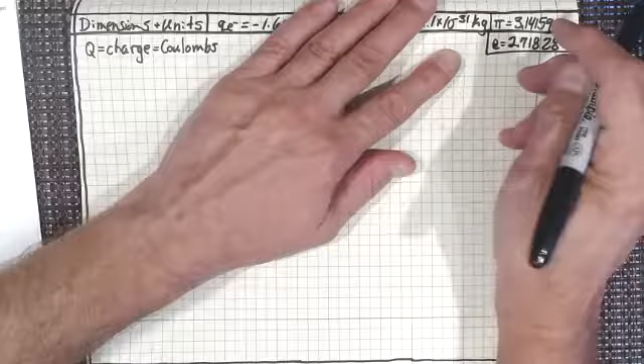So take that away with you, and you're probably way ahead of me guessing what I'm going to ask you to do next. Now let's just look at this for a second. So I know that one electron is minus 1.602 times 10 to the minus 19 coulombs, right?

So then the next question is, if I had a bucket of electrons, and inside that bucket was 1 coulomb's worth of electrons, right? We've got a bunch of electrons trying to escape here out of my electron bucket. So I've got a bunch of electrons. How many electrons do I have in that bucket?

Think about it. How would I figure out if I had minus 1.602 times 10 to the minus 19 coulombs per electron, how many electrons would I have in 1 coulomb? I'm sure you're saying, okay, his units there, coulombs per electron, if I just reciprocated that, I'd have electrons per coulomb, right? If I just took the reciprocal of 1.602 times 10 to the minus 19,

I would get 6.24 times 10 to the 18 electrons per coulomb. See how I did that?

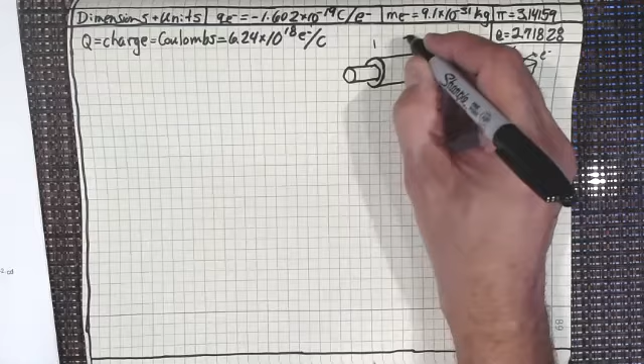Now, what if I had a very short piece of wire, right? And around that wire I had some—let me draw this first. Don't tell any art teacher. So let's say I've got a piece of wire, about 3 inches long, from one end of the wire to the other.

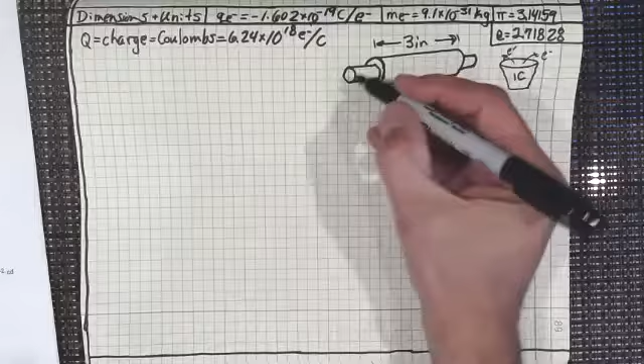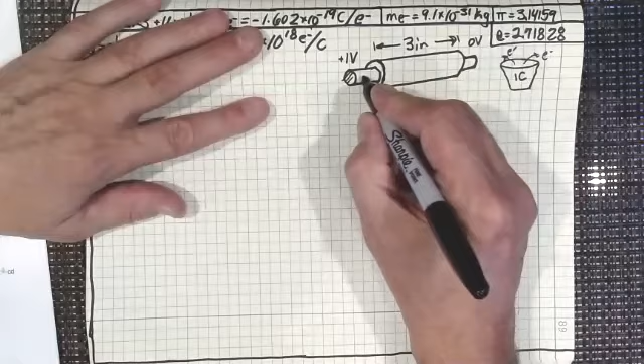This is something that will be counterintuitive to your understanding, but believe me, I'm going to explain it. Now, remember, we've got this cross section here, and let's say I have plus 1 volt on one end of that 3-inch wire, and 0 volts on the other end. Now let's say that if I was looking at a schematic of the wire, I have a 1 ohm resistor.

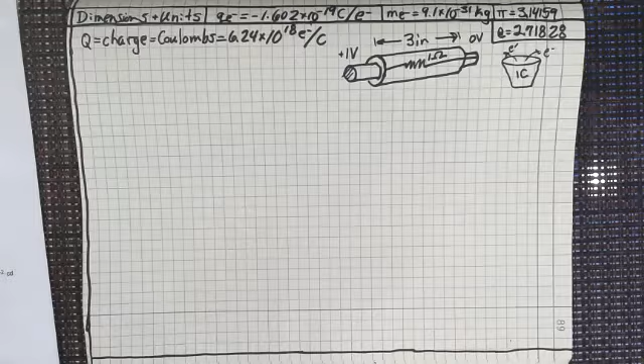That wire has got like 1 ohm of resistance in it—hardly any resistance. That would actually be a lot more resistance than a real 3-inch wire would have, because a 3-inch wire would have close to 0. But let's say we made this wire out of metal, like aluminum or copper. So schematically, I've drawn it as 1 ohm.

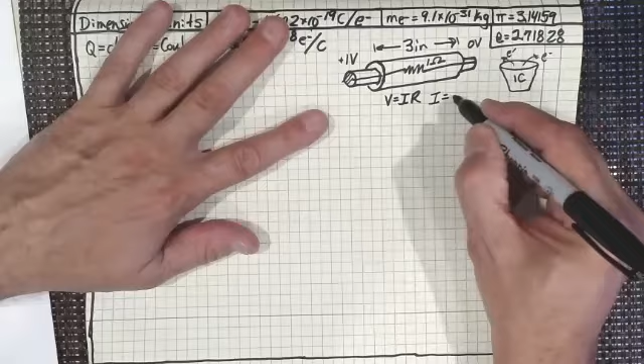And with Ohm's law, V equals IR, which some of you may be familiar with from high school, that tells us the current flowing through that wire would be 1 amp, because I would be voltage, 1 volt, divided by R, which is 1 ohm. That gives us 1 amp. So I would have current flowing through that wire.

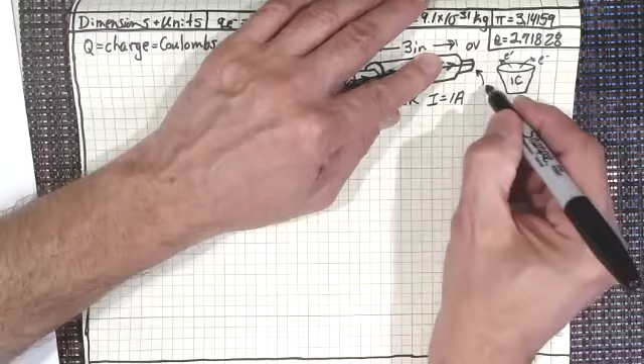And of course, we know that current flows from the positive to the negative, so I'd have current flowing through that wire from positive to negative. Electrons, by the way, go in the opposite direction. I'm just going to point that out—electrons go from negative to positive, so if we were looking at electron flow, it would be flowing in that direction. But the current, I, is flowing in the positive to negative direction.

I'm sure everybody understands that. I just thought I'd point out that electron flow, being a negative charge carrier, goes in the opposite direction to the current, which we've defined as going from positive to negative. We did that because at the time current was defined, we had no concept of charge and everything else. Of course, charge carriers are electrons, and that's what we've got. So that's quite a bit that we've got there.

Now, if that's 1 amp, right?

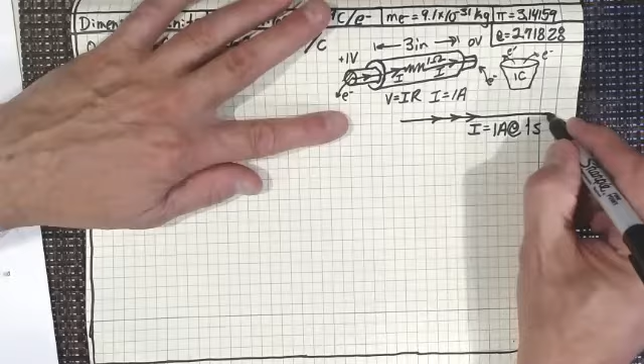Now 1 amp, 1 coulomb. If I have a wire, and I have current flowing through that wire, right? My current is 1 amp flowing through that wire, and I flow the current through that wire for 1 second. 1 amp for 1 second, that will transmit 1 coulomb of charge.

1 amp flowing through a wire for 1 second transmits 1 coulomb, or 6.24 times 10 to the 18 electrons. Isn't that incredible? 6.24 times 10 to the 18 electrons transfer through a wire that's got 1 amp for 1 second.

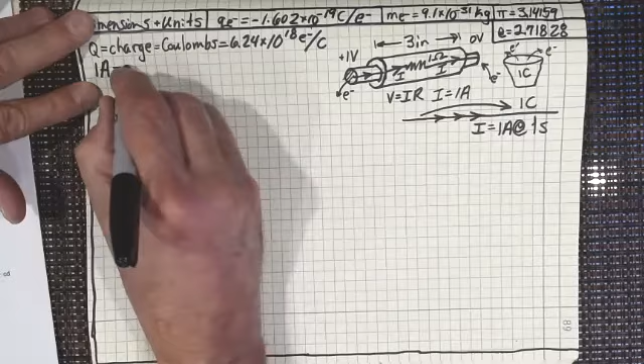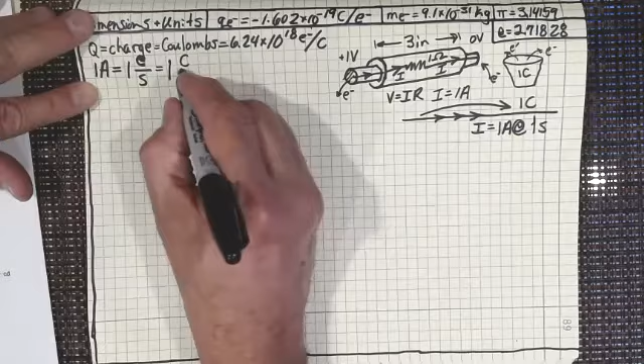So what we can say, since we know that an amp is current, right? We can say that 1 amp equals 1 coulomb per second. That's supposed to be a C. 1 coulomb per second. God, it doesn't look like a C, does it? I'm going to write it again. 1 coulomb per second equals 1 amp.

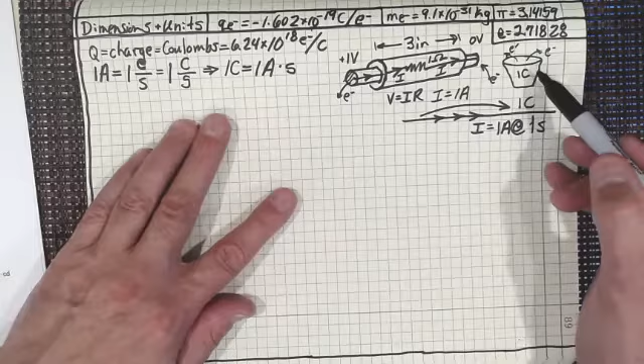Now you could say, okay, we could say it's 1 coulomb per second, or we could say 1 coulomb equals 1 amp second. Notice I've got the dot there - it's not amp per second. Of course it's not, look at the algebra we've got here. 1 coulomb equals 1 amp second, and that would mean 1 amp for 1 second gives me 1 coulomb of charge. That gives me 1 bucket, or 6.24 times 10 to the 18 electrons in 1 second, 1 coulomb. All right, does everyone understand that?

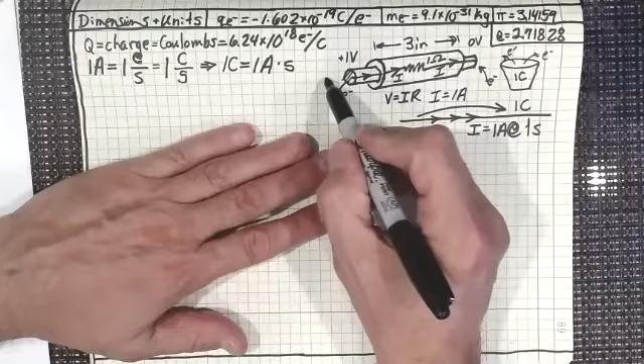Now, I want to also point out, what if I had this set up and I just threw a switch, right? How long would it take an electron that goes in one end of this 3-inch wire to get to the other end? Let's say I colored the electron that's going in this end - I made it orange. I stick an orange electron in one end here. How long does it take to get out the other end of a 3-inch wire?

You're probably saying, oh, it's got to be the speed of light. No. What this electron does is it goes into the crystal lattice that's in the copper. It knocks an electron out of an atom there. And then that electron starts going and hits another electron in another atom, and it knocks an electron out of there, right?

Although as soon as I throw the switch, the electronic pressure - just like your shower, right? As soon as you turn on your shower, you don't have water from the reservoir immediately come into your house. No, you have water that's been in the piping system for 7 days that's coming into your house. But as soon as you turn that faucet on, the pressure, the water pressure, pushes that water that's been in the pipes for 7 days out onto your face. I know all of you are thinking, oh my God, what have I been doing? That's right, what have you been doing?

But it takes about an hour. It would take about an hour for this particular orange electron that I tagged to knock other electrons free and keep moving down, and to actually get out the other end, right? So I'm just going to put him here. I want you to think about that.

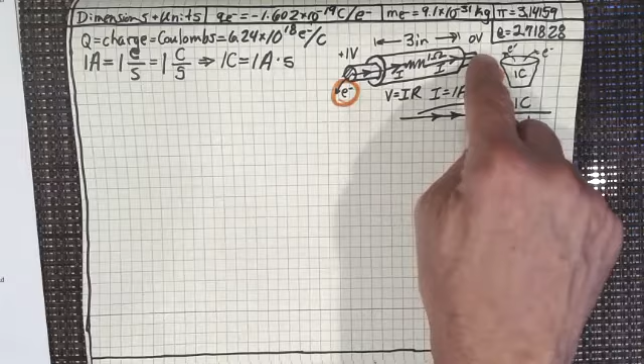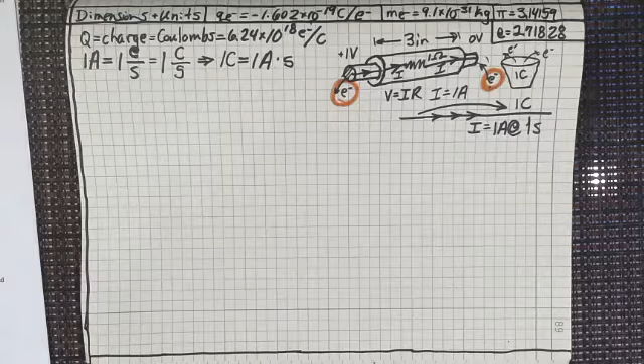The same thing's true here. As soon as I throw that switch at 7/10 the speed of light, I start getting current flowing through here, but that one electron is going to take a long time to actually get through that wire to the other end, because there's already so many electrons on the inside that it has to push out before it gets to the other end. I hope I made that clear. I love to try to make people realize things that are counterintuitive to what they may have learned prior to this.

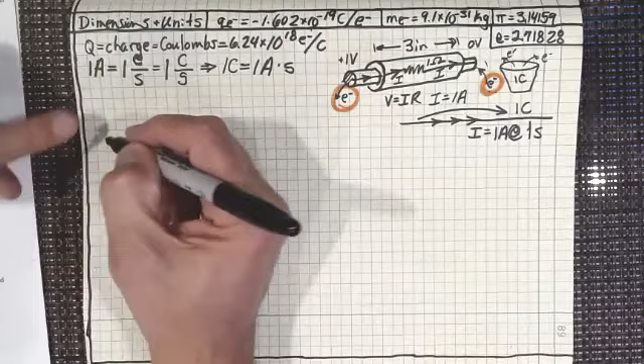Anyway, so now that we have charge out of the way and an understanding of charge, electronic charge, out of the way, let's look at what that gives us in some ways. What is capacitance?

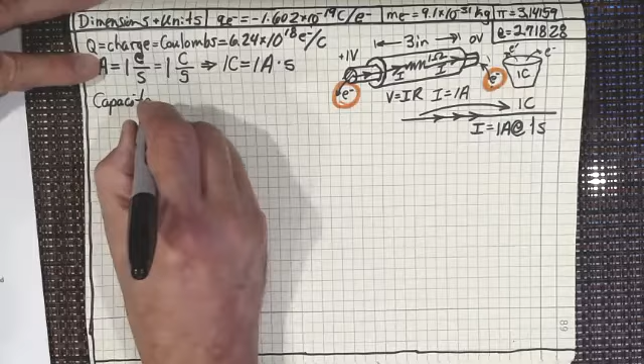Capacitance is just charge divided by voltage.

I'm going to draw the capacitor for you, and I want to discuss a capacitor for just a second in general terms. I'm sure some of you have had some familiarization with capacitors, maybe in high school or whatever. So let's say I've got about 100 volts on this side, and we'll call this side ground.

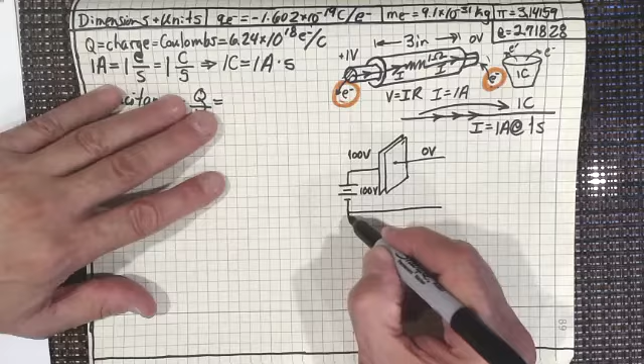How would I hitch that up? I would just run this down to a battery, a 100-volt battery, and then run that over to ground. Everything from here to here is really just a short circuit. So I've got this set up like that.

Now what's in the middle? Right now I'm saying this plate over here is 0 volts. This plate over here is 0 volts, and the plate on the other side is 100 volts.

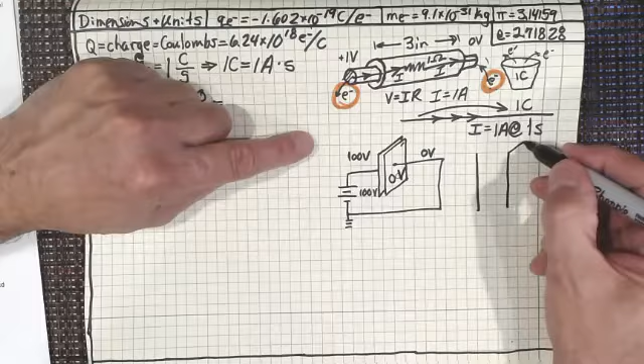So let's just blow that up in 2 dimensions to see what I've actually got there. One plate is going off this way, and the other is going off this way. But what's in the middle of that? It's an insulator, yeah, that's right.

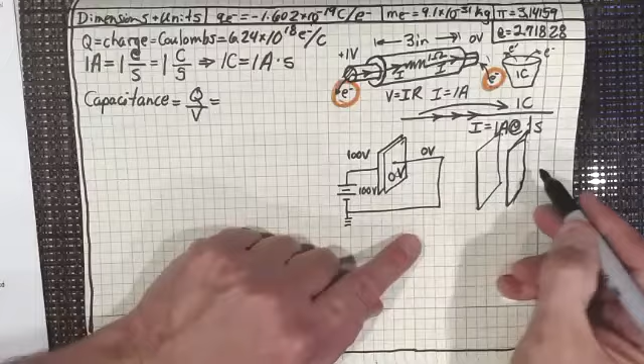Don't ever think that there is one electron going from one side of that capacitor plate to the other. This is a charged plate, and this has a charged plate over here. They both have equal and opposite charges on both sides of those two plates, just like I've drawn there. But what's in the middle of those two plates? They never touch — in a capacitor, the plates never touch.

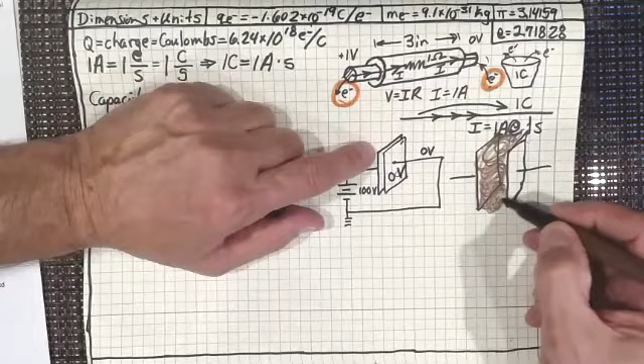I want to point that out. I hope this works, because that looks nice... oh no, of course it doesn't, because all of these pens hate me. What do I got here? Oh, that's brown. Oh yeah, we'll use brown.

So I've got barium strontium titanate, which is a fantastic dielectric and an insulator in the middle of this capacitor, and I'm charging the two plates.

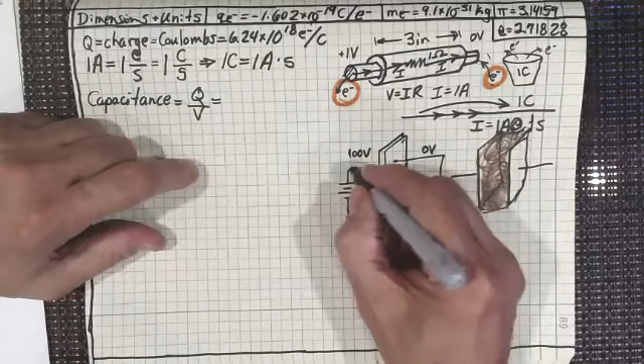Now what happens to the current? Let's say that instead of having this all connected, I actually have a switch. I'm just going to put a little switch in here, and I can throw that switch.

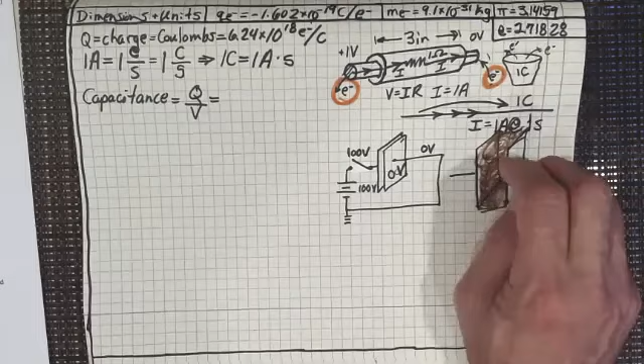Now, the capacitor is uncharged to begin with, so I don't have any positive charges here or negative charges here. In fact, the dielectric itself is unpolarized. That's what happens to the dielectric inside — it starts to get polarized, where its negative charges go to one side and its positive charges go to the other side.

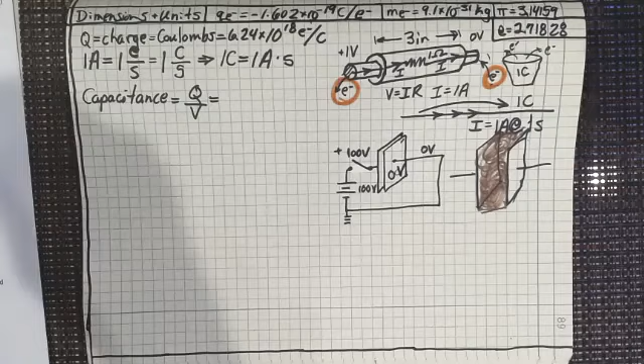So when I throw that switch, I'm going to put a plus on here to let everybody know that's positive. Now, what attracts to the positive? Isn't it the negative? Once I throw that switch, the negative charges are going to start to align over here — that's what happens, so I'm getting more and more negative charges over here.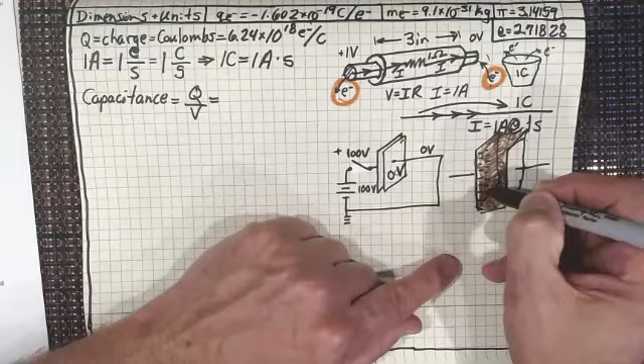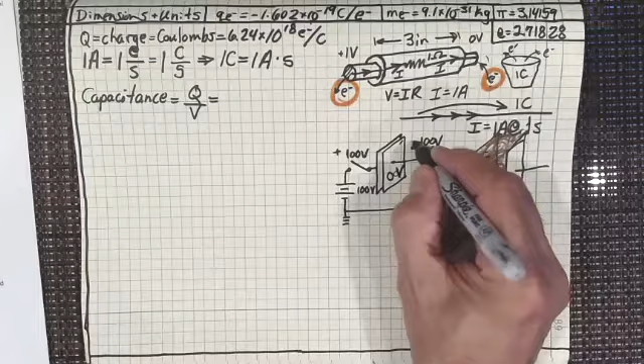Hey, what's going on at the other end? This is the negative over here, so this is my negative. In fact, instead of making that 0, why don't I make it negative 100 volts, so in your mind it really sticks. So I've got minus 100 volts on the other side connected to this thing right here.

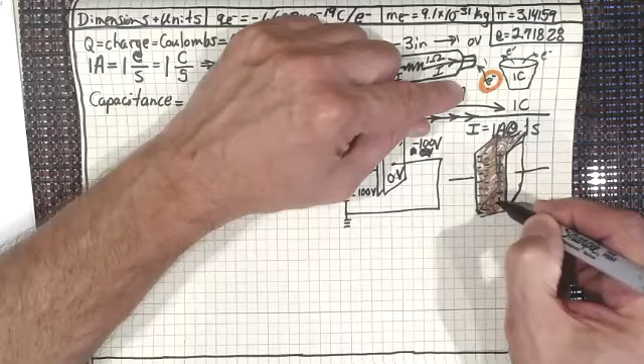So I've got minus — and what's that going to attract in the dielectric? That's going to attract a lot of positive charges in the dielectric to line up here. So there's never an electron that ever transfers through a capacitor. Now, the next thing I want to ask is, once I throw this thing, is there going to be current flow?

Oh, you know there is. Oh, yes, absolutely. The charges in here are going to start to move in that direction.

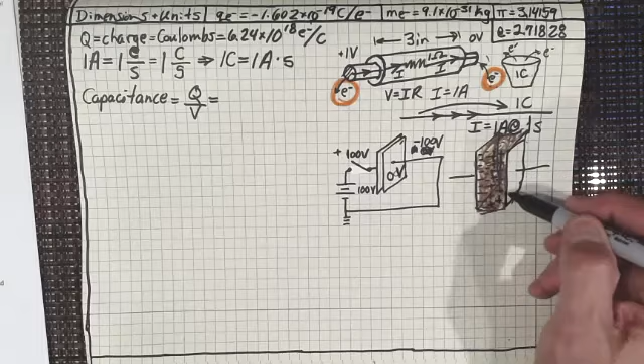So as soon as I throw it, we're going to have these charges lining up, and for them lining up, that's going to change what the polarity is in the things right here, in the electrons within the wires. So the electrons within the wires, well, that's positive, right?

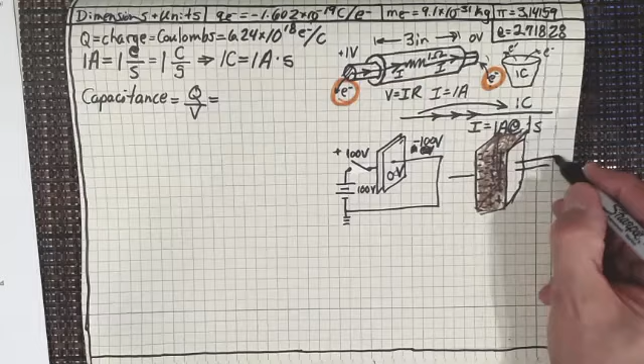So what's going to happen? The electron that's in the wire here, let's make the wire a little bit larger and make it look like a pipe. Because isn't it really a pipe for electrons?

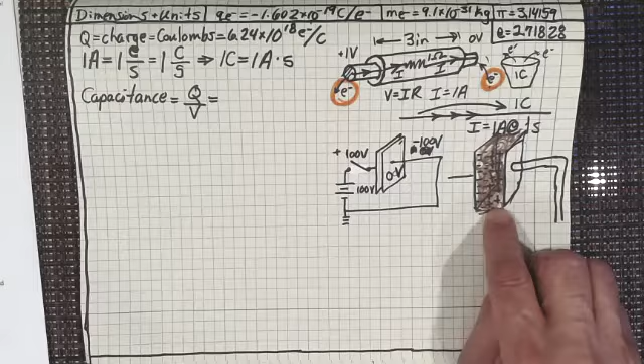So now on the plate here, the plate is going to be positive. And where are the electrons going to go, right? Aren't the electrons going to be attracted to the positive side of the capacitor? See what I'm trying to do for you here? I'm trying to teach you.

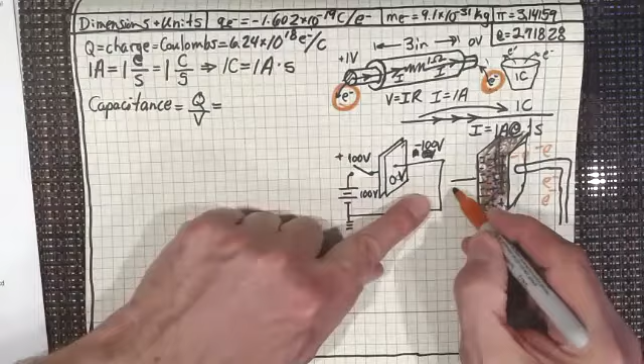Now, how about the electrons in the wire over on this side? I'm using the wrong color there. So I've got another wire over here on the other side. How about the electrons in that wire? Aren't they going to be pushed away from this, and going to start to go in this direction?

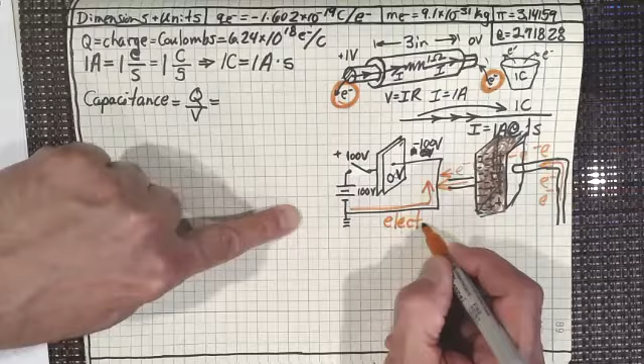So we've got wires that are flowing, electrons that are flowing in that direction, electrons that are flowing away from this negative polarity that we've got here, and they're flowing in that direction. So we've got the electrons flowing in this direction, right? That's my electron flow. I hope you're getting all this down. You're getting a fantastic lecture.

Where's my other color that I've got here? Do I have a purple? Oh, the purple never worked, did it? I got a couple browns. Oh, let's see what this color is. It's black. Okay, and then the current is going in this direction, sort of a gray, right?

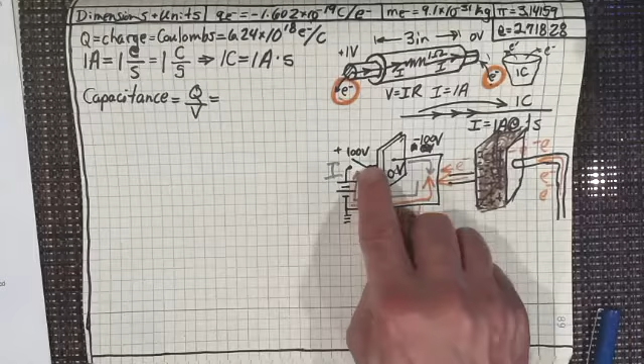So my current is going in that direction, and the electrons are going in the opposite direction. So as soon as I throw that switch, even though I've got a capacitor in here, I still get current flow. As soon as I throw that switch, the capacitor acts like it's not even there for the first instant, the first millisecond, the first microsecond. It acts like I've got no capacitor there, and I've got a short-circuited wire right across that capacitor.

I thought I'd just throw that in. We're getting a little off track. Let's get back to capacitance.

So, charge. We know that charge is a coulomb, and we know that that is an amp second. And what's voltage? We know that voltage is a kilogram meter squared per seconds cubed amp, right?

Well, let's just simplify that in our heads, because you're engineering students and sophomores, and you know what you can do. And you know that we've already taken the numerator times the reciprocal of the denominator, so we get an amp squared seconds to the fourth over a kilogram meter squared.

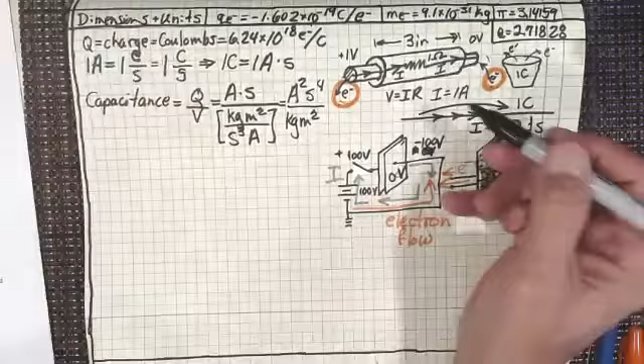And what do we call that? We call that a farad, after Michael Faraday, the great British scientist and experimenter. And so that's capacitance. Just a second.

Where is that? I thought somebody was at my front door, but I guess not. Anyway, so that's a farad, and that's capacitance.

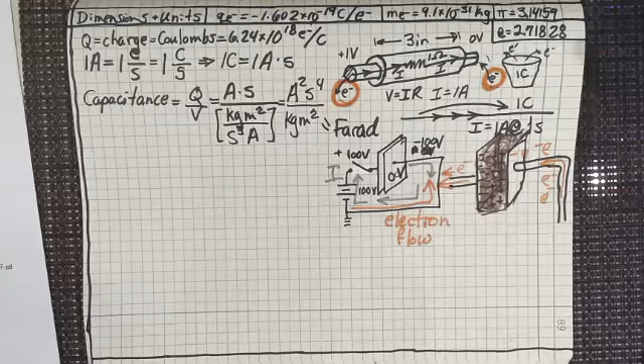And so what I want to do next is I want to talk a little bit about magnetic fields. But I also want to catch up on a couple things. Before we do that, let's look at pressure.

You know, pressure, if we define an equation, it's really force per cross-sectional area, isn't it? Well, we know that force is a kilogram meter per second squared, and we know cross-sectional area,

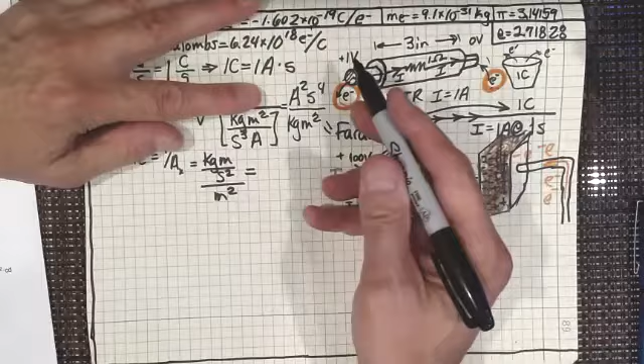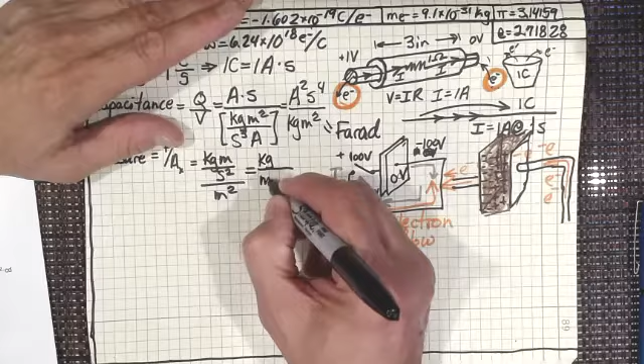is meters squared. Sorry about that. I was thinking of the next unit that I'm doing while I'm doing this one. Getting a little bit ahead of myself, so let's just, if we multiply the numerator by the reciprocal of the denominator, what we end up getting is a kilogram per meter second squared.

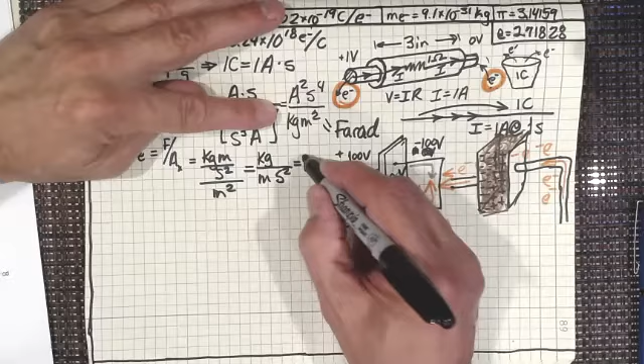And we actually have a nickname for that unit. It's called the Pascal, and we usually write it as PA for pascals.

I've never really seen just the P all by itself. I suppose that would represent something else. I don't know, but we use PA for Pascal. Might as well write it out there. I actually named my son Pascal, but not the same Pascal.

It's actually Paschal, after the patron saint of Paris. And I don't know why that says T. Oh yeah, that's because that was a negative, wasn't it? Okay, so that's a Pascal.

When I say pressure, this could also represent stress, because if we looked at a tensile specimen, a piece of steel or aluminum, and we were pulling on it with a force, let's say 10,000 newtons, and then we look at the cross-sectional area, we can do the same thing. We could say that stress, using sigma for stress, is equal to the force in that solid piece of steel divided by the cross-sectional area.

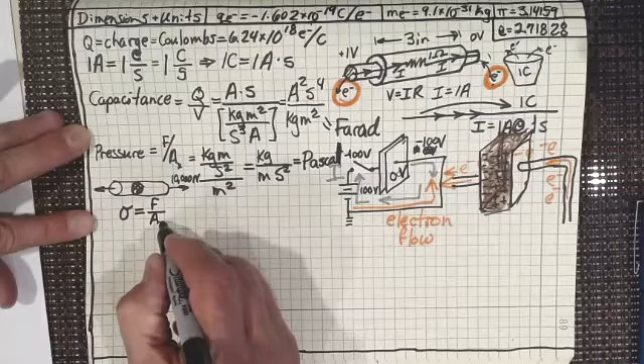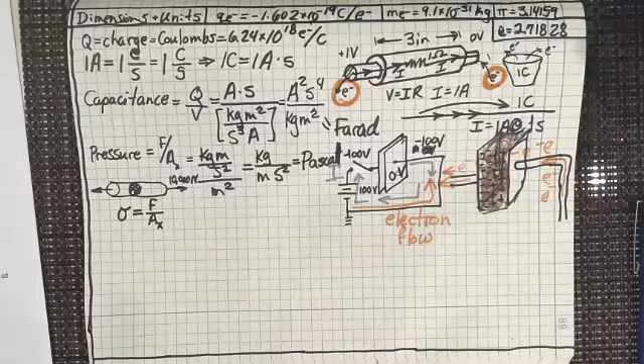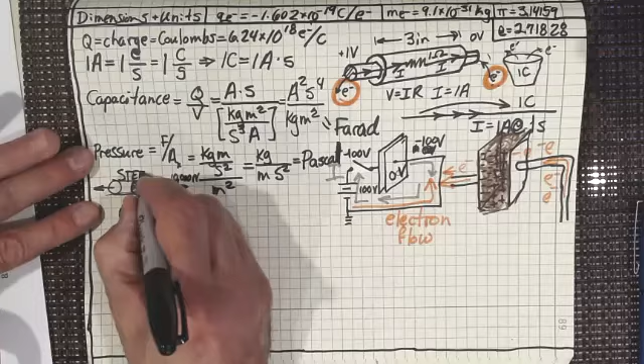When we're looking at pressure, we're usually looking at a fluid or a gas. I should say fluid, because that includes both liquid and gas. So we're looking at a fluid pushing on a cross-sectional area, like the water on the bottom of a dam gateway. When we look at this, we're looking at the tensile forces inside a piece of steel. This is more solid mechanics, whereas pressure is more for fluid mechanics.

And so we get the same thing here, pascals. Now what is a pascal really? A pascal is really energy per volume. And that's why I named my son Pascal, because he's really energy per unit volume. Yes, I know, don't be the son of an engineering professor—there's the moral of that story. Although my son loves his name, his nickname is Pass, and he's a great soccer player, so that's all good.

All right, so energy is kilogram meters squared over seconds squared, and volume is meters cubed. You see what I'm really doing here? I'm just teaching you how to use these units.

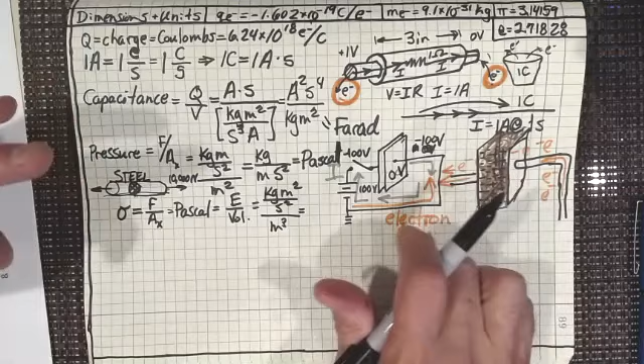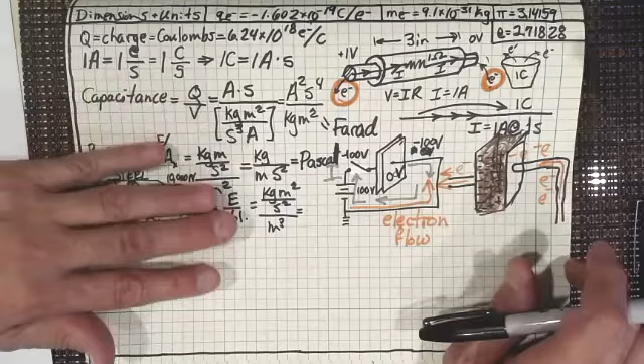All throughout your life, you're going to be doing this with units. You're going to say, the heat coming out of that cup has to do with the thickness of the cup, and someone's going to say no, it doesn't matter how thick the ceramic is, heat comes out just as fast. You say no, I think the thickness of the cup is slowing it down—if I make that cup twice as thick, it'll be half as fast. I'm talking about the conversation that the people who figured out heat transfer actually had. So let's go back to this now.

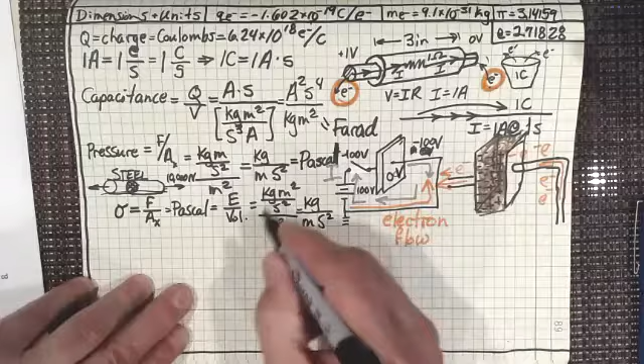Now this is cubed, and we get the same thing, kilogram per meter second squared. So yes, energy per unit volume is the same as pressure, is the same as stress in solid mechanics, is the same as pressure in fluid mechanics. They're all the same—it's energy per unit volume. All right, so I got that out of the way.

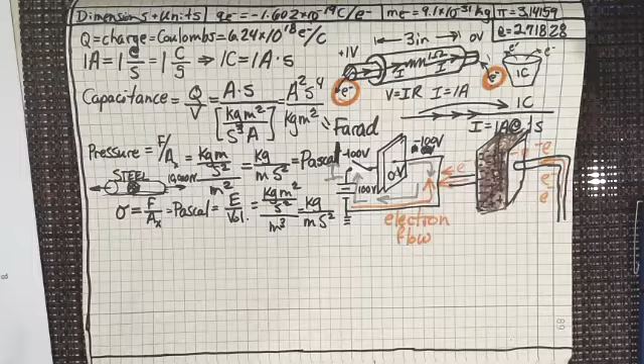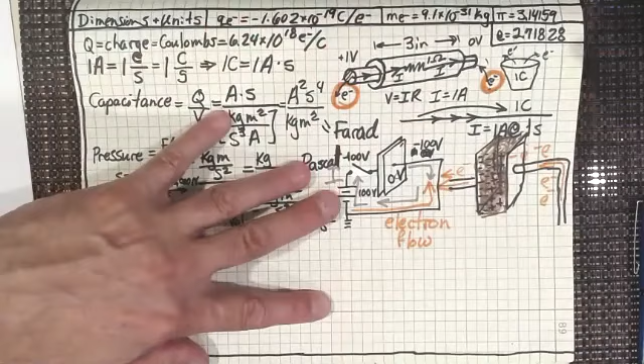The next thing I wanted to look at is flux. Before I do that, I just want to look and have a discussion. Why don't I have that discussion of flux in the next one? I'm going to continue presenting these.

So magnetic flux is, well, let's say voltage times time. I just want to get this out—we'll have a much longer discussion of what magnetic flux is later, but just to talk about the dimensions and units of magnetic flux: voltage, which is kilogram meters squared per seconds cubed amps, times time, which is just a second, gives us kilogram meters squared over seconds squared amps. Now what do we call that?

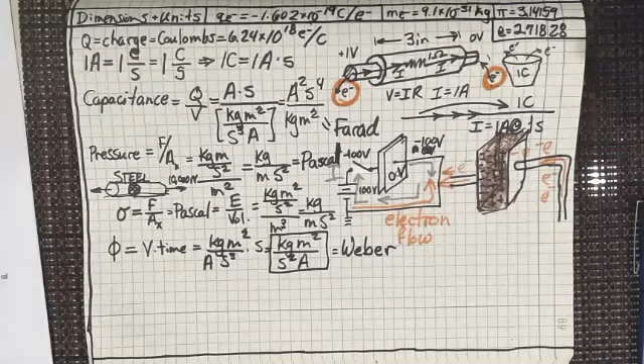We call that a Weber. Yep, it's named after a barbecue grill that we use—no, of course it's not, but that is what we do. And what am I talking about here? I'm talking about magnetic flux.

And we'll have a much more in-depth discussion of magnetic flux about the middle of the lecture series.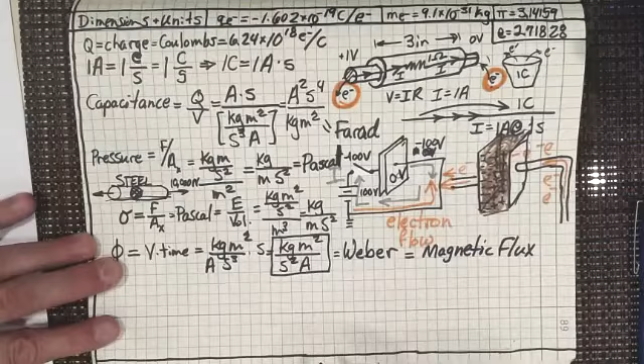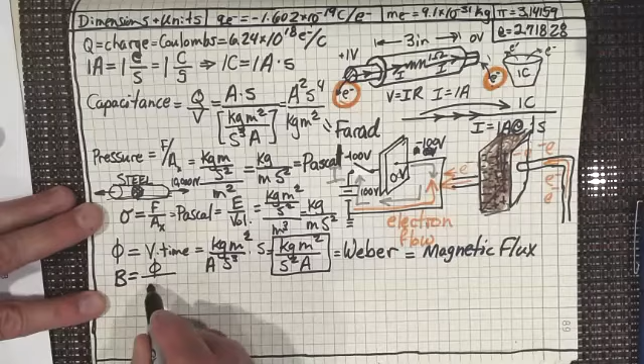Now, the next thing I want to look at is something that you're more familiar with, and that's magnetic flux density. What that is, is magnetic flux per cross-sectional area. We want to know the amount of magnetic flux that's flowing through things.

Let's say that I had a bar magnet right here. This is the south end, and this is the north end. Well, I have flux that's going to be flowing out of the north end into the south end. I'll just put some arrows here as to the direction it's going. So we've got flux that's flowing out.

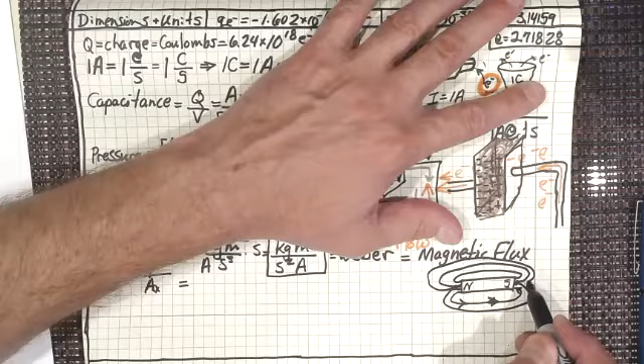I think everybody can see that if I was to take a cross section right here, I'm going to have a lot more flux lines going through it than if I take the same size cross section out here. So I'd have a lot of flux density here, and I'd have a little flux density here. And that's what magnetic flux density really tells us.

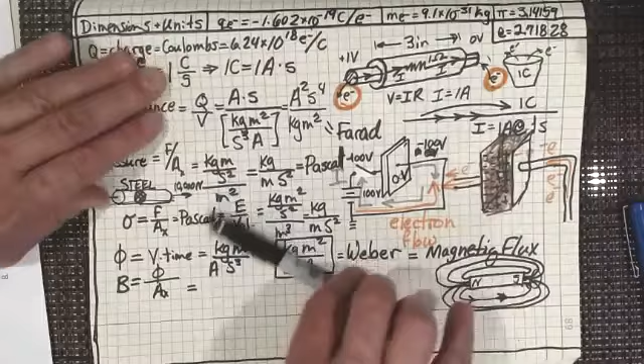So flux density really tells us where the magnetism is really intense. Where is the magnetic strength the greatest? And of course, it's the greatest right here, not out here in the middle of the flux lines.

So when you look at that, it'd be over the area. So this would be kilogram meters squared over amp seconds cubed, divided by meters squared. I think everybody can see that that gives you a kilogram per amp seconds... oh, did I say cubed? I'm sorry, I meant seconds squared, amp seconds squared. So there we go, kilogram per amp second squared.

And we have a name for that too. In fact, that is something that we use even more often because we talk about the magnetic field at the surface of the Earth, and this would be a Tesla.

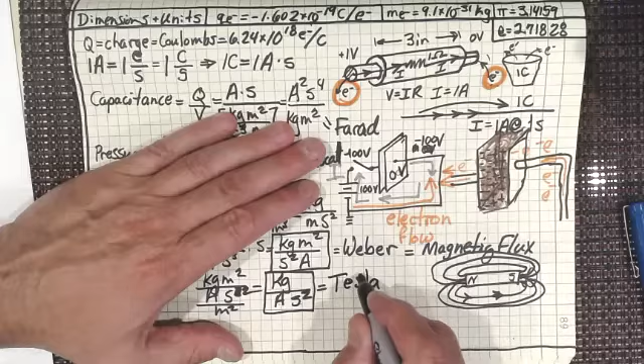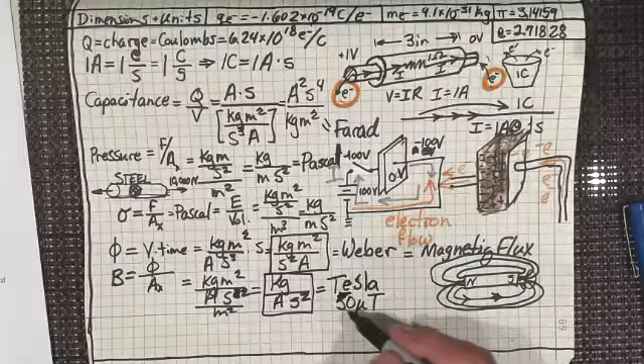Now, what is the magnetic field at the surface of the Earth? The magnetic field at the surface of the Earth is about 50 microtesla. 50 microtesla is the terrestrial magnetic field of the Earth.

And we talk about the magnetic field of the Earth in flux density terms, not in flux terms. We don't know, I don't know what the overall flux of the entire magnetic field of the Earth is. It's got to be quite substantial, I'm sure. Somebody at NASA does know the answer to that, but I don't.

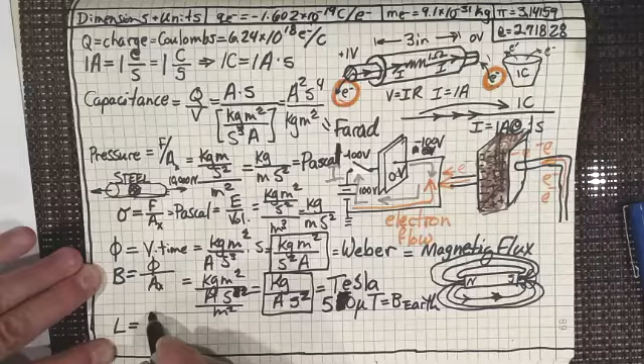The last one that I really want to look at is inductance. And what inductance is, is really flux per amp. So if we do the math there: kilogram meters squared over seconds squared amps, and we divide that by an amp, that's going to give us kilogram meters squared over seconds squared amp squared.

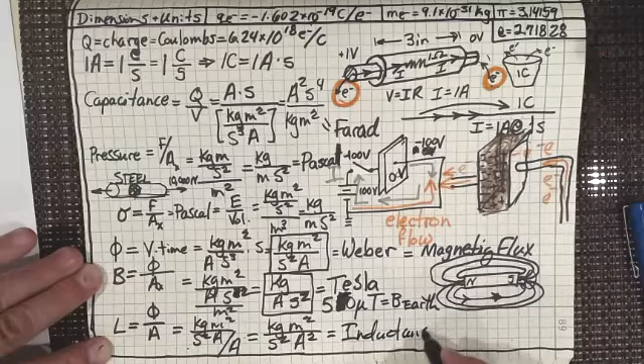And we have a name for that. That's the unit of inductance, or the dimension of inductance. And the unit of inductance, of course, is a Henry.

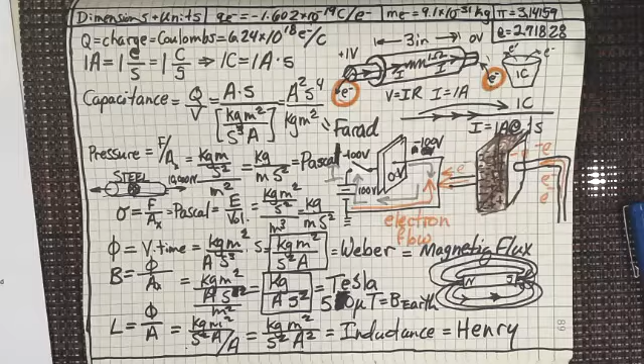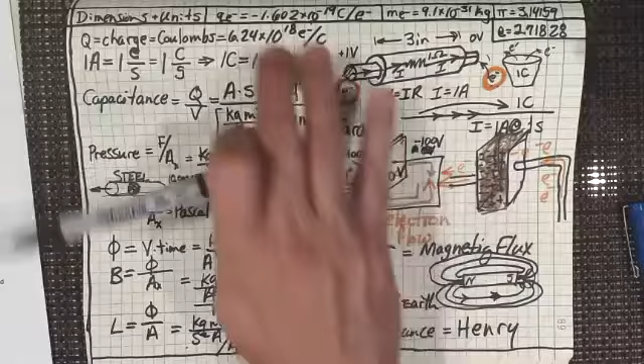And so that ends the dimensions and units part of the course. I could get into so many other things, and we're going to definitely talk more about capacitors and inductors, how inductors store energy, how capacitors store energy, all of those things all throughout the course.

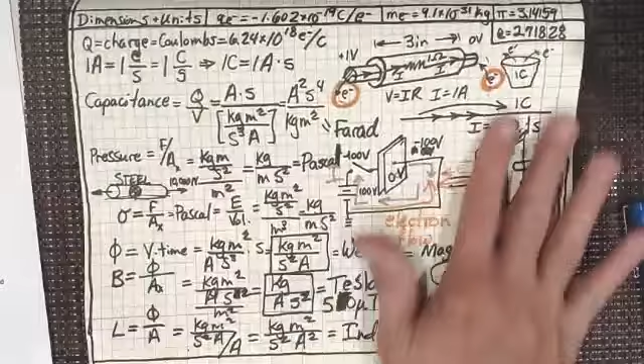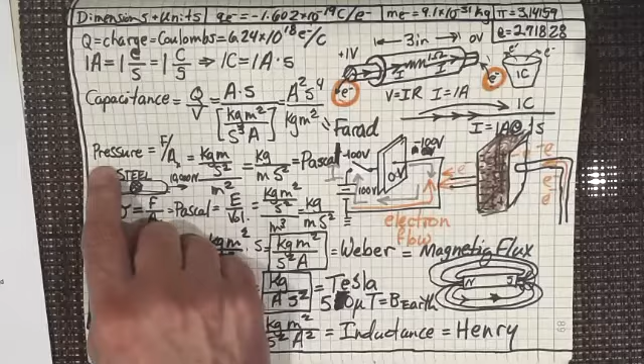In the mechanics course, we're going to be concentrating more on this, which is the steel, the pressure, and all of those things. However, all of this is important for your general understanding of engineering dimensions and units. You'll also be working with engineers from other disciplines, and you'll want to understand pressure. Don't say, oh, I don't want to understand pressure because I'm an electrical engineer. No, you want to understand the units of pressure. All of these things intertwine all the time. So focus on that.

All right, I'm going to end this lecture here now. This is our third and final lecture on dimensions. Then we're going to start getting into the meat of the course.